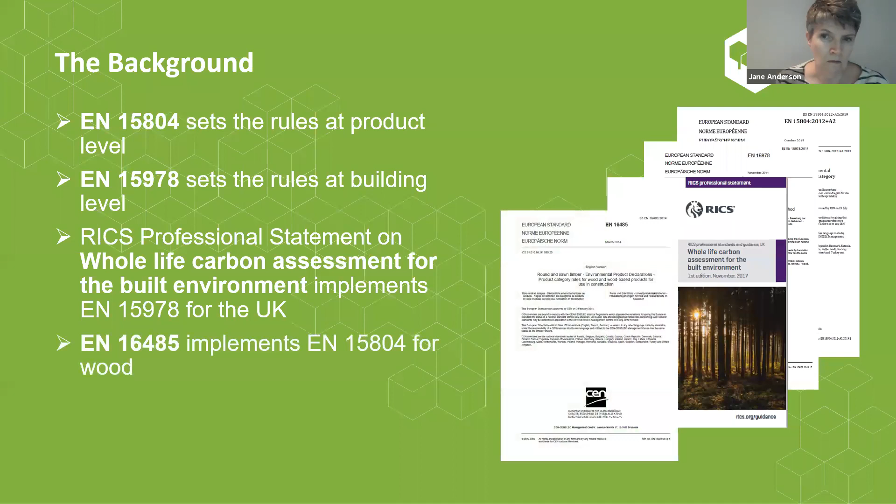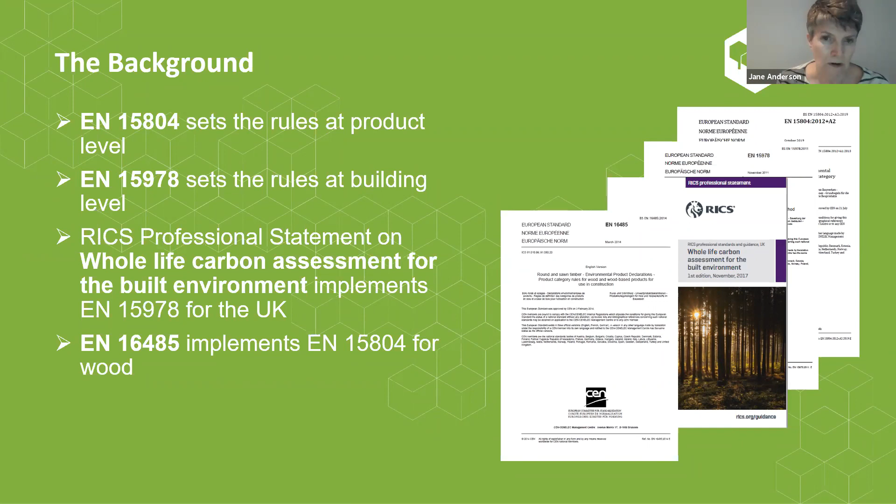The fourth standard that we use is EN 16485, and this is basically the timber industry's implementation of the EPD standards. It provides guidance on the detailed application of the EPD standard for timber, so we've relied on that quite heavily in terms of setting out exactly how you look, for example, at the end of life and at carbon sequestration.

And then the final standard is EN 16449, and that's quite a simple standard, but it basically gives you the rules to calculate how much biogenic carbon is actually contained in wood, and we'll come back to that. So that's the basis of what we've provided to you. This is the context and the background.

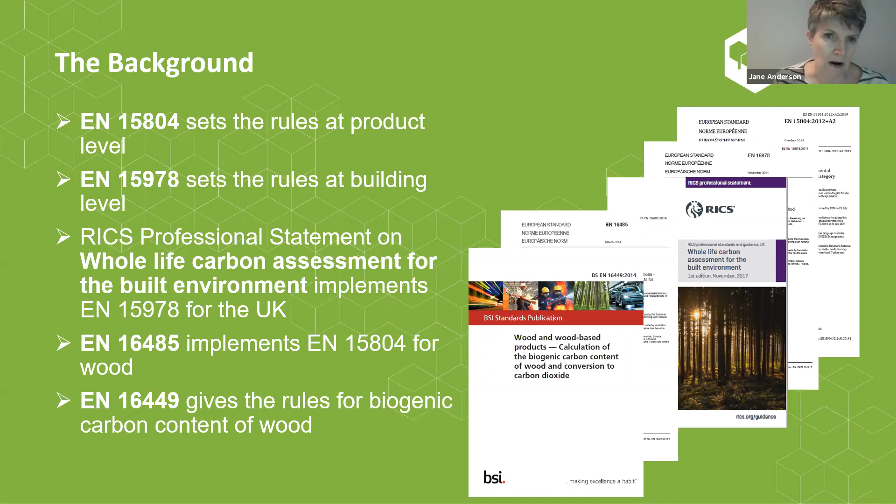As I say, these standards all kind of mesh together. They use a common framework, which I'll show you in greater detail, but it basically breaks down the life cycle of products into various stages and then into individual modules. So all of these, when we do an EPD, the data is provided in each of these modules. And when we assess a building, we can use the data for those modules to build up a picture for the actual building using exactly the same process.

And that's used in the European standards, it's used in these wood standards, and it's also used in the RICS professional statement. The professional statement is the methodology being used by the GLA, the Greater London Authority, in their requirement now for larger projects to do whole life carbon assessments. It's also been referenced, for example, in the requirement for projects to do whole life carbon by the IPA, for benchmarking. It's kind of the government's large scale procurement guidance that also links to it.

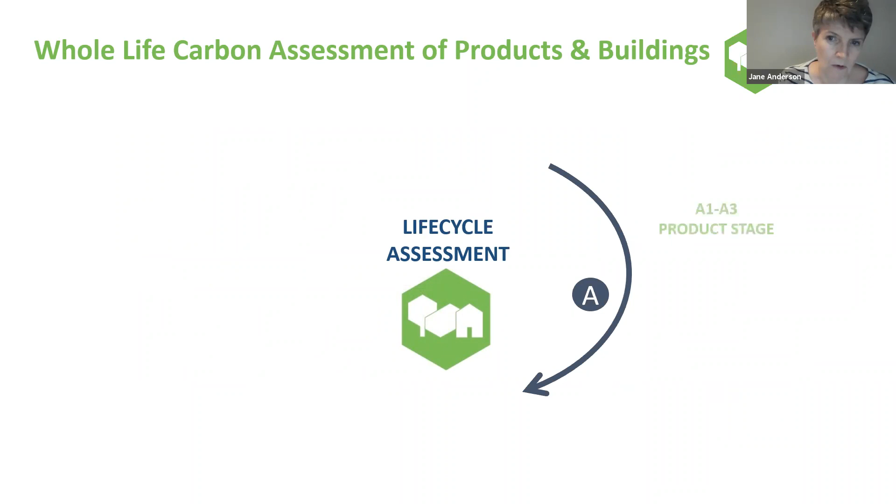As I say, in terms of life cycle assessment, we break it down into stages. A stage - these are all the stages here. The first bit is the product stage, A1, A2, A3.

So within EPDs and at building level, these can be grouped or they can be broken down. But basically, for a tree, for example, A1 would be what happens in the forest, the processes of maintaining and managing the forest and actually harvesting the timber. A2 is the transport, for example, to the sawmill, and A3 manufacturing would be what happens in the sawmill when the timber is actually processed.

Then we have the construction stage, A4, transport to site, and A5, the construction process and installation. That deals particularly in A5 with, for example, any wastage, what happens to that material, and the impact of actually making and transporting that product in the first place and then disposing of it or preparing it for recycling and reuse. So that's all the A stage of the life cycle.

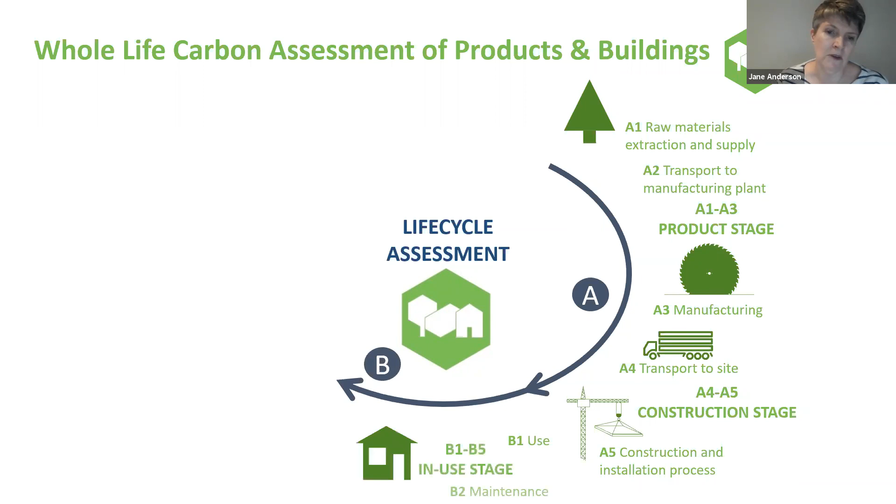Then we have the B stage, and there are B1 to B5, which are all related to the materials, if you like - emissions in use, the maintenance, repair, refurbishment and replacements. And both these life cycle stages are part of embodied carbon.

We then, as part of the A stage, going back there, and then up cradle to gate, up through the product stage and the construction stage - that's commonly called upfront carbon. So that's - you might have seen that recently - and that basically is all the impacts up until practical completion. I will come back to one special aspect about upfront carbon in relation to timber, so it isn't all of the impacts and benefits there.

And when we look at module B, there's also operational carbon. So this is basically all of the impacts from providing energy into the building for heating, cooling, lighting, ventilation, and for water - so providing hot and cold water into the building. So that's the whole of the B stage, the use stage.

And then we have module C, the end of life stage. And that basically covers the deconstruction or demolition of the building, the transport of waste from the building, any waste processing until it reaches the end of waste, or disposal. So if it's put into landfill or if it's incinerated without very much energy recovery, then that's in module C. And again, module C, because it's relating to the materials, is considered as embodied carbon. So we have this split between embodied and operational carbon.

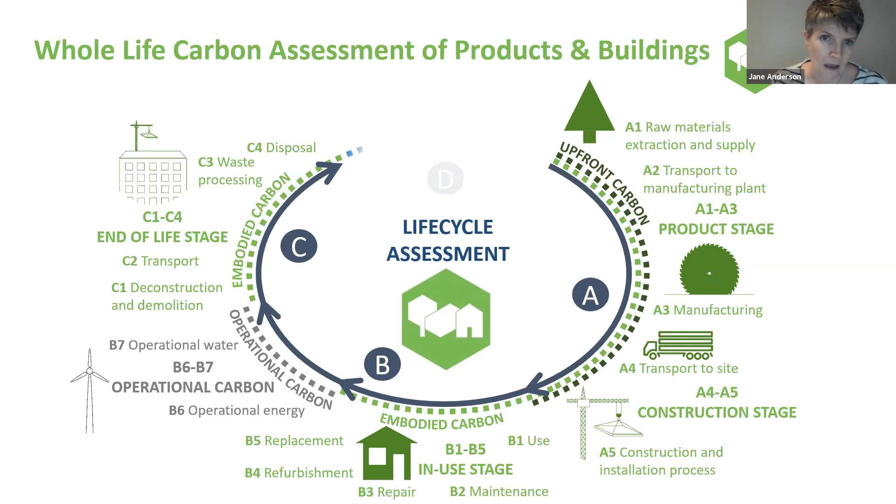And then the final stage of the life cycle we call module D. So basically, it's not actually part of the building life cycle. It's the benefits that occur beyond the end of the life of the building, or when waste comes out of the building and it's recovered.

It basically shows the benefits of that in terms of avoided production. So quite often you have to recycle, say, metals, and then show the benefit compared to making new metal from scratch. That's included in Module D. So it's a kind of indication of the circular economy.

It has to be said, one of the problems with it is if you were to build your building entirely of recycled materials, then your Module D would actually potentially show a big disbenefit of having to produce materials to top up, because you wouldn't have generated any waste, and you potentially produce less waste than you've actually used as scrap, for example. So it's not a perfect indicator of a circular economy, unfortunately. But this is the kind of life cycle that we follow all the way through.

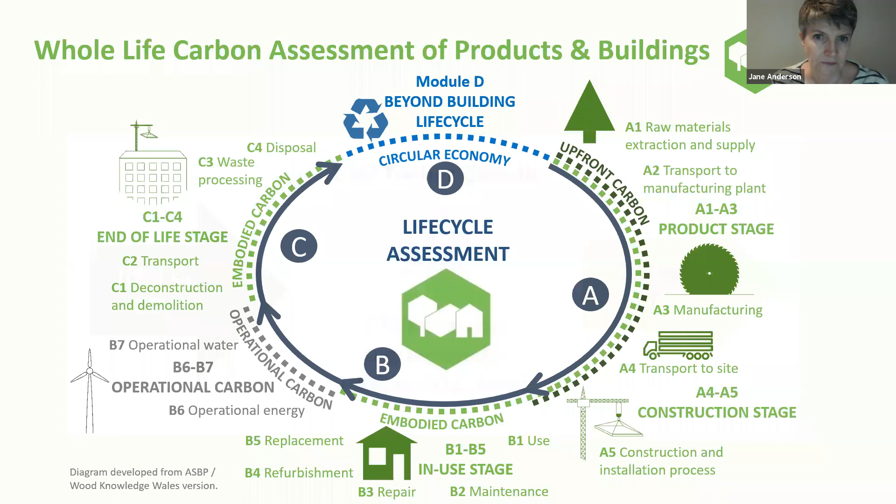So one of the huge benefits of timber is that it sequesters carbon as it's growing. You can see here that 1 cubic meter of timber, as it's grown, is expected to absorb about 1,000 kilograms of CO2, and also beneficially produce about three-quarters of a ton of oxygen at the same time. And that will store within the timber - this is wet timber - about 273 kilograms of carbon within it. So this is a huge benefit, taking CO2 out of the atmosphere and storing it while the timber is growing.

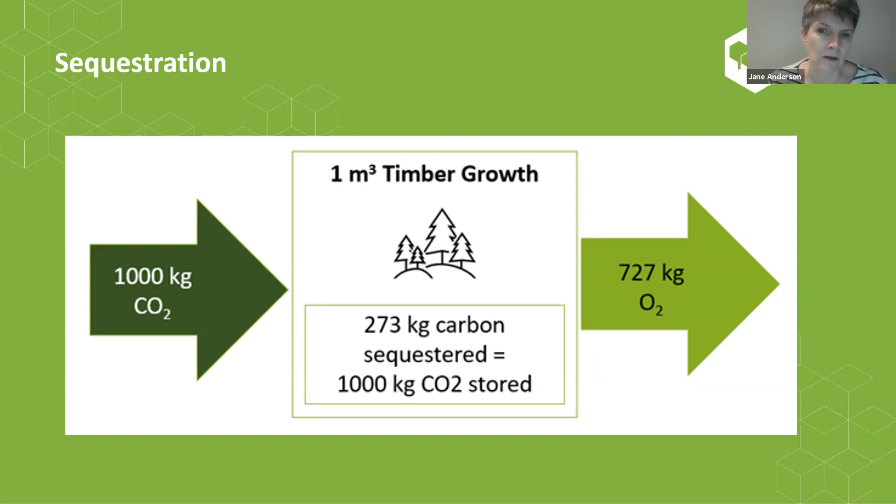The question is, what do we do with it when it goes into the building? But we'll come to that. And as I say, this is a huge benefit. It's not just the timber that's within the tree itself, but we also have what's in the root system, within deadwood, within litter, and the soil within forests.

When we look at the same graph in the UK, obviously because we don't have as much forest - I think it's only about 13% of the UK land area is forest - and we use a lot of imported timber, so we have more harvested wood product in the UK as a proportion of our timber, but it's still quite substantial. So it's really a question of how we show this and how we assess this when we're doing life cycle assessments and embodied carbon assessments.

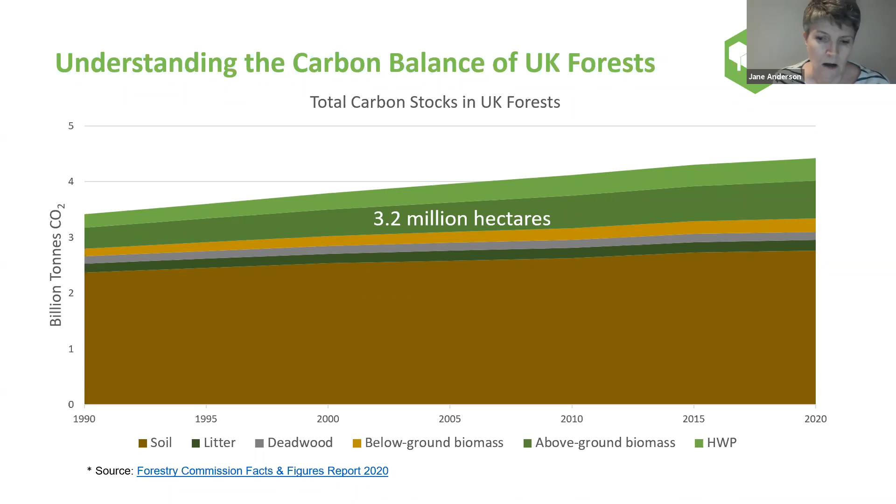Just highlighting a house, typically if it was made with a timber frame and timber cladding, for example, it could store almost 15 tons of carbon CO2. So it's quite a substantial benefit that's come into the forestry system and then been transferred into the timber that's being used, and what we actually end up with stored in the building.

Then at the end of life, there's effectively two things that can happen to it. One, it can be released - so if the timber is, for example, burnt in an energy recovery system, then the CO2 is released. Or it can be recovered, and if that timber goes, for example, back into timber products as particle board, if it's chipped and used in particle board, then the carbon within it basically stays within the building and out of the atmosphere.

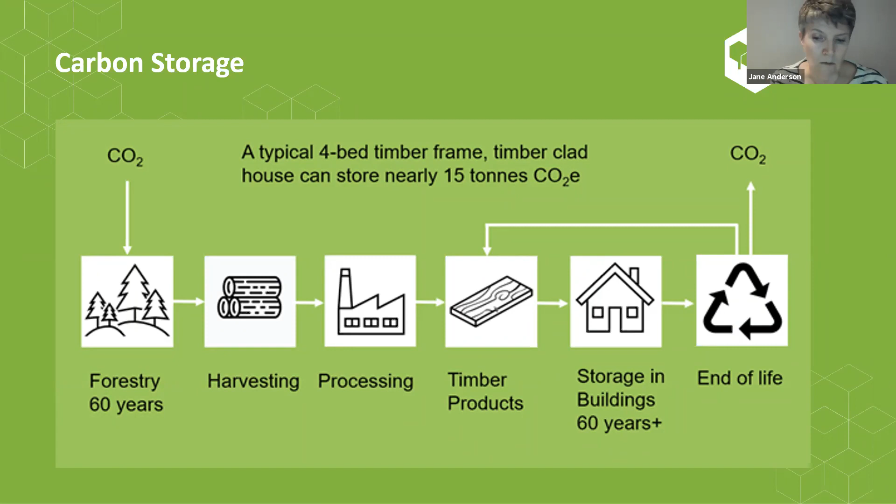We also have other routes it can go in terms of recovery, so it can go, for example, into animal bedding, but those tend to be quite short-lived, and at the end of that life it's probably going to be released again as CO2. So it really is the best option if we can recycle timber back into timber products that will have, again, a long life in buildings.

So the big question: fundamentally, we have this carbon that's stored, brought into the forest through sequestration and photosynthesis. Then when the timber is harvested, that carbon is transferred into the products that we have. And there's a question about when we should account for this.

I think this diagram shows you three different approaches. The short dotted line in the top graph shows the carbon in the forest, which accumulates gradually, and you have more within the forest because we've got carbon within the soil and within all the timber that's harvested.

When it goes to the sawmill and is processed into a product, some of that carbon is transferred to products like particle board made from the sawdust. Some of it is used for energy, and we only end up with a proportion of it within the products.

So we could account for it being accumulated over the life of the forest and then coming into the product. There's another approach that's been suggested. The first approach we call backwards looking. The second approach, forwards looking, would be to say you harvest the timber and then start to count the carbon being added to the forest that you've replanted.

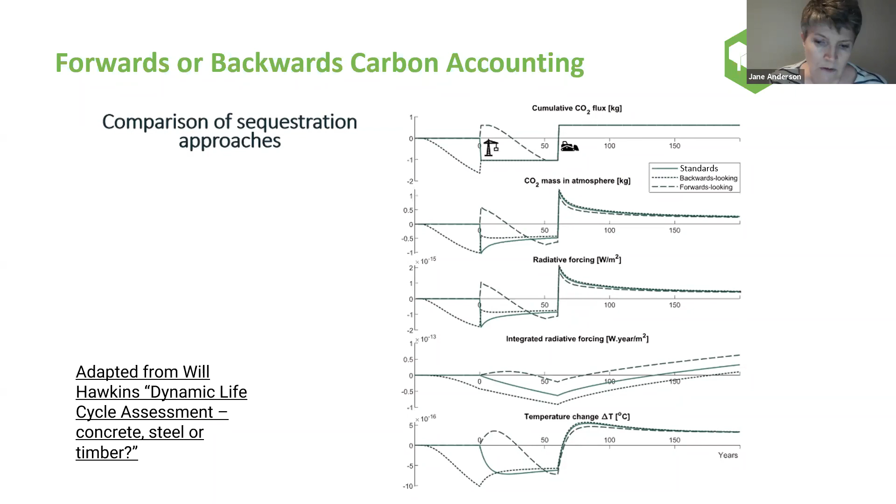I think effectively this middle ground, assuming the timber enters the system from the forest and that the forest is a separate system, works quite well, and that's what we do within the timber calculations. At the end of life of the building, there's a big increase, which is what happens when you dispose of the timber, or it's recycled and transferred.

So now, how do we actually calculate how much carbon is in products? This is where the standard 16449 that I mentioned comes in. There's a formula which is a bit scary, but effectively for timber, due to the chemistry of cellulose and lignin, half of the dry mass of timber is basically carbon.

You multiply that carbon by 44/12, which is the mass ratio of CO2 to carbon, to get the mass of CO2. So it's effectively a question of knowing how much timber you have, its density, its moisture content, and being able to find the dry mass and halve it to get the mass of carbon stored within it. For other products, it's more complicated, but you have to look at the chemistry to work it out.

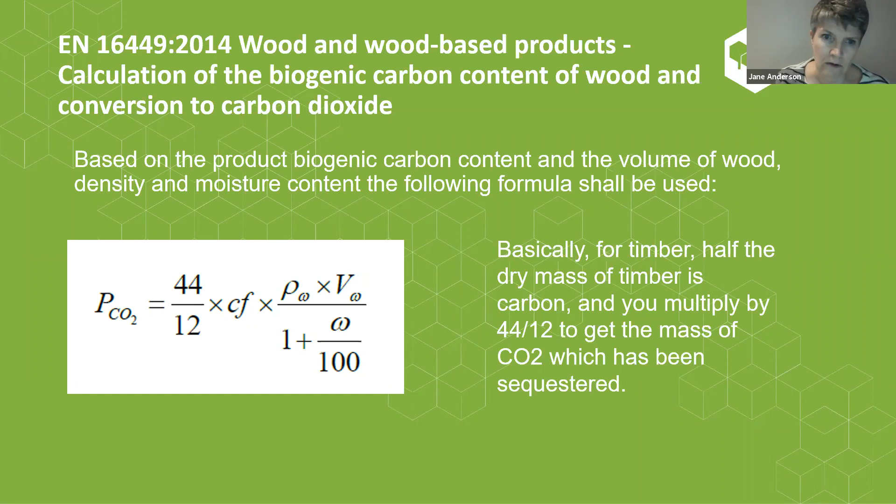As I said, you're not always allowed to take account of sequestration, and it's slightly annoying that we've got two different approaches in the two versions of 15804. The new version came out in 2019, and the old version, 15804A1, will stop being used at the end of this year, but there will still be EPDs valid for around 5 years, so it's still going to be there.

Effectively, 15804A1 looked at whether the timber was sustainable or not. There were two routes: one was if the amount of forest carbon was increasing in the country, that's Article 3.4, and also if it was sustainably managed, so PEFC, FSC. In both of those cases, you were able to take account of the sequestration. That was the first approach.

What we have now in 15804A2 links to the way the European Commission's product environmental footprint looks at timber, and they are very keen on ensuring that what they call native forest is not used. The way they define native forest is that it's not managed forest, not degraded forest, and there's no harvesting or rotations of taking timber out of it - it's primary forest where there's no human activity, or old growth forest. That's the differentiation.

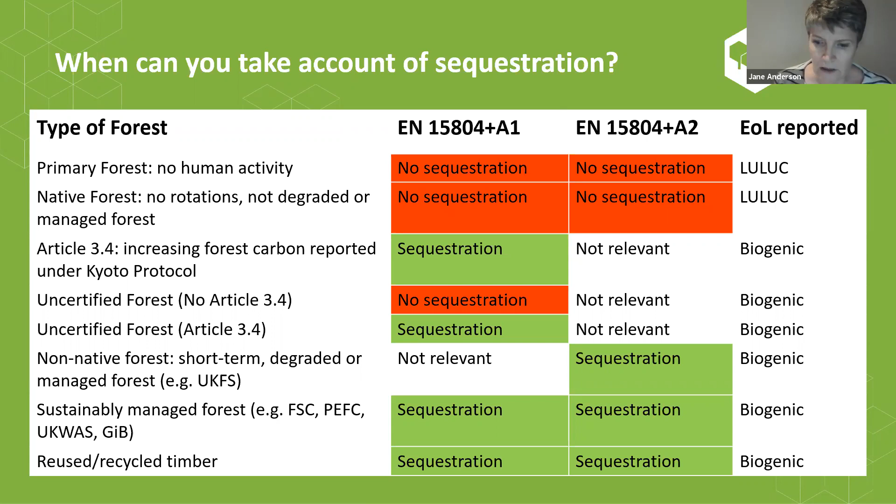Just giving you some information here on the Module A1 stage. What we do is we assume that the timber, when it's looked at in A1, this is where the timber is harvested, this is where the carbon comes into the system. You can see here, this is pretty typical for softwood, that it's got 733 kilograms of stored carbon, CO2, within it, and a relatively small amount of fossil CO2 that's actually been produced during that process of growing the timber and extracting it, because it's fundamentally a very low impact process.

You then have the impact of transporting it to the manufacturing plant. Again, generally these manufacturing plants are located close to the forests, so there isn't huge amounts of transport here. And then the actual manufacturing, again pretty small, because it's now very, very common in forestry, in sawmilling and timber processing, that they're actually using the timber waste - the sawdust, the chips from processing it, the bits that are not quite square that you get from a circular trunk - they're using all of that wood waste as fuel instead of gas or another form of heat.

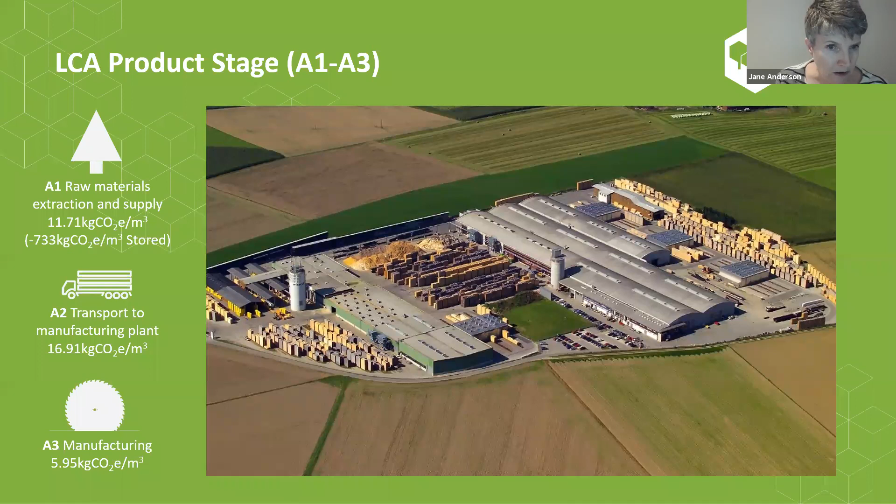They're very often also using CHP, generating electricity through that process. So very often you'll find there's very little manufacturing impact because it's using bio-based energy there. Where we do have more impact is in terms of transport to site, particularly seeing as we're importing a lot of timber in the UK - I think about 80% of the structural timber we use is imported. Then we have the actual process of construction and installation, and again that can be a significant impact, particularly if you have timber wastage and the processes of lifting and installing it.

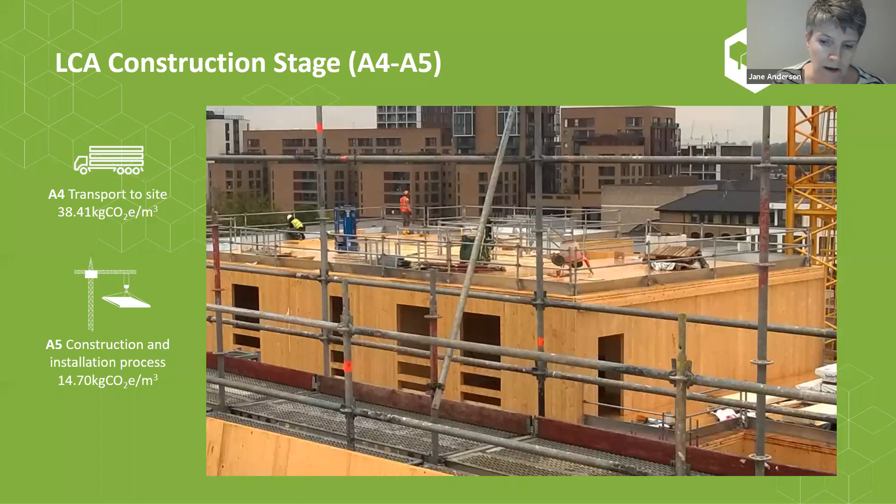When we look through the B stages, it's really about maintenance, repair, replacement. The way to minimize impact here is in terms of reducing replacements, using timber that's more durable. The example here is heat treated timber from Brimstone, which, because it's been heat treated, is much more durable than normal timber would be, and it doesn't need the preservation processes - again reducing the impact of the building going forward.

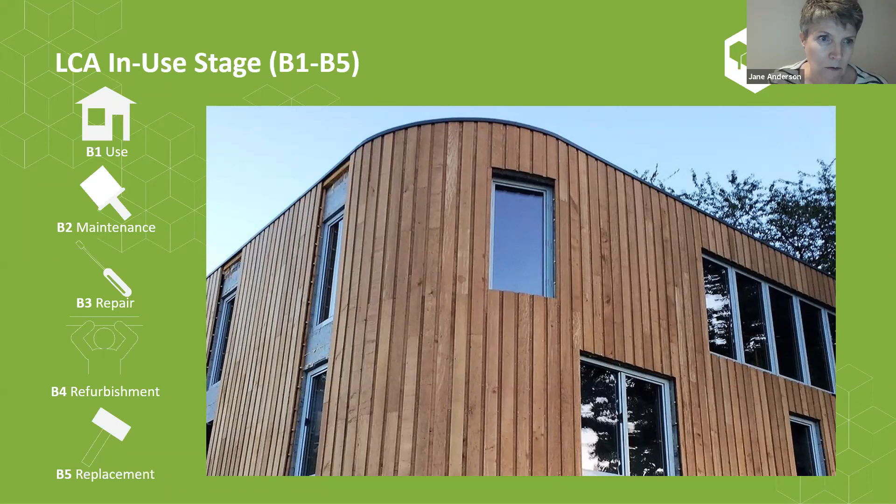It's Brimstone, that's the name you're thinking of, Jane. Thank you, that's on the tip of my tongue.

And then we have the end of life stage, and this is where it gets quite interesting. The impact of deconstruction and demolition is generally not terribly big, because it's not a particularly intensive process.

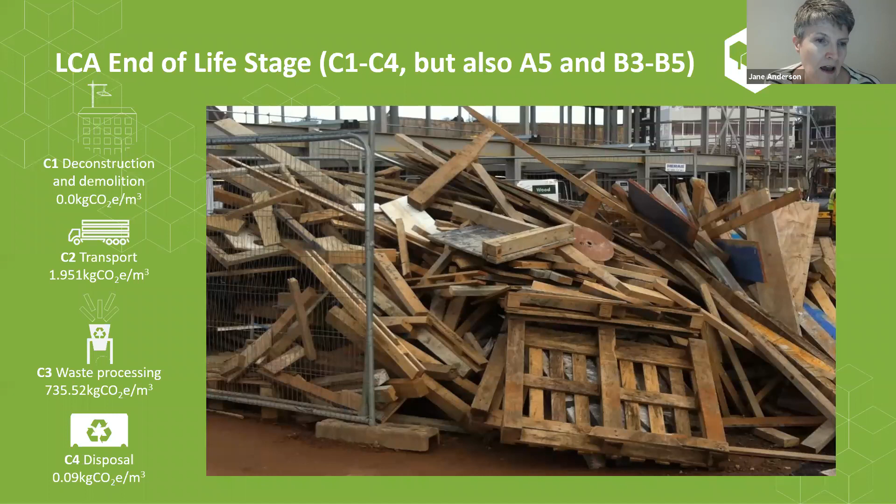Transport can be significant, but not particularly, because most waste processing is now reasonably close to where buildings are being demolished. Then the waste processing, you can see here there's really quite a significant impact. This is basically because when we recover wood, or use it for energy recovery, that carbon basically leaves the product system.

So it's either emitted when we burn the timber, or it's transferred to the next product system. You saw that recycled timber has this sequestration, it's able to take it. Because if you're recycling timber, you basically need to take the CO2 out of your system and transfer it to the next system. So it's treated as an emission, even though that timber hasn't actually gone into the atmosphere. You can disagree with that, but it kind of has to happen as an accounting process. We may at some point find a way of providing more information about the benefits of keeping that timber within the building system and out of the atmosphere. At the moment, that's not possible.

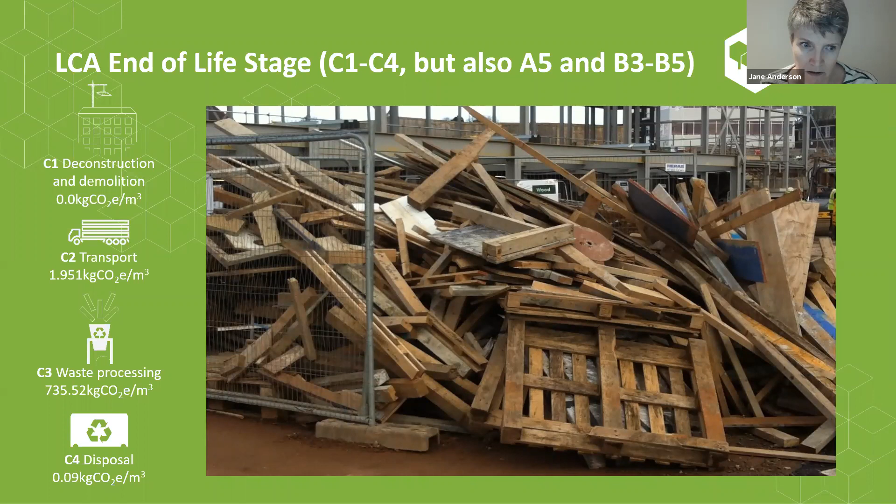And then in C4 here, this is basically just dealing with residual waste from that recycling process. But if you were, for example, to landfill your timber - it's very uncommon, about 1% of timber is landfilled now - then the way the standard looks at it, you actually have to report any carbon that hasn't decayed and been released as landfill gas and potentially used for energy, and you have to transfer that to nature. So you would have a substantial emission in C4 if you were landfilling timber, but hopefully that happens very, very rarely.

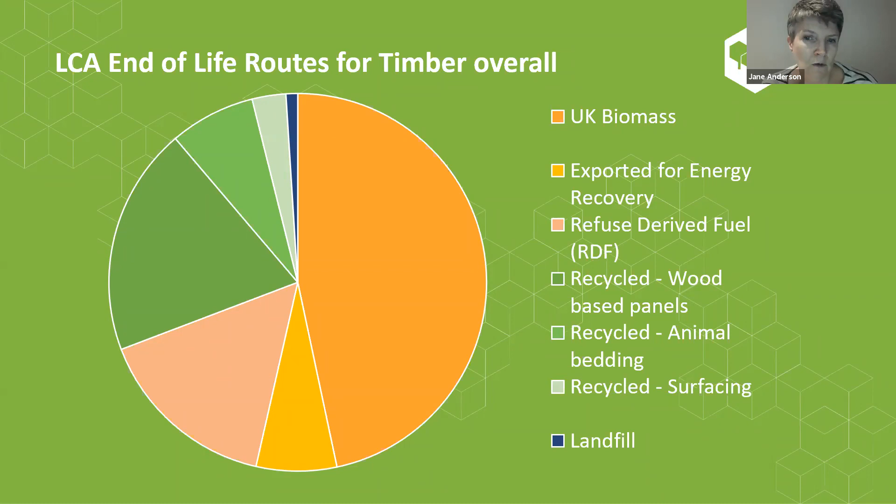So this is just an overview of where we think timber generally is going, and you can see that actually the vast majority of timber is used as biomass fuel, exported for energy recovery overseas, or refuse derived fuel for the kind of low grade timber wastes. A reasonable proportion, just under a quarter, is actually recycled into wood-based panels, a smaller proportion into animal bedding and surfacing, so kind of equine surfaces, things like that. And, as I say, a very small proportion into landfill.

If we look in a little bit more detail, this is just looking at the breakdown for different types of product in terms of where they can go. So you can see, for example, that it's only solid timber that hasn't got any preservative treatment that can actually be used for animal bedding and surfacing. None of the products that have glues in them, so engineered timber or wood panels, products like plywood or chipboard, or any of the timbers that use preservatives, can be used for that purpose.

Effectively, kind of biomass, using it for energy - all of those can be used, particularly in the large biomass installations that have very good processes in terms of disposing of hazardous timber, for example. So everything can go to that. Reuse - most of these products can be reused, and that's by far the best option if we can. Unfortunately, it's not yet as common as we would hope it could be.

So this just gives you an overview of where timber can go, and hopefully things like the refuse derived fuel - that's really only for the very low grade, kind of what's left residuals - rather than if you've got a large piece of timber, it's much more likely that hopefully it would either go to wood-based panels or be used for energy recovery.

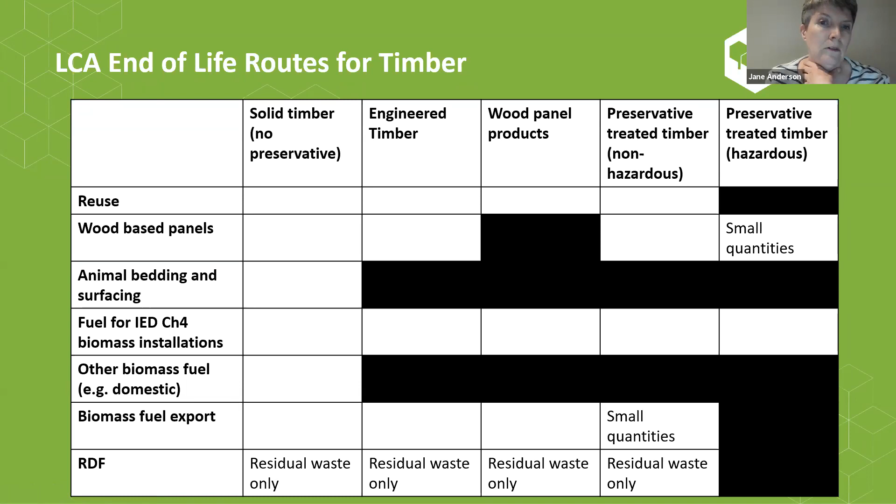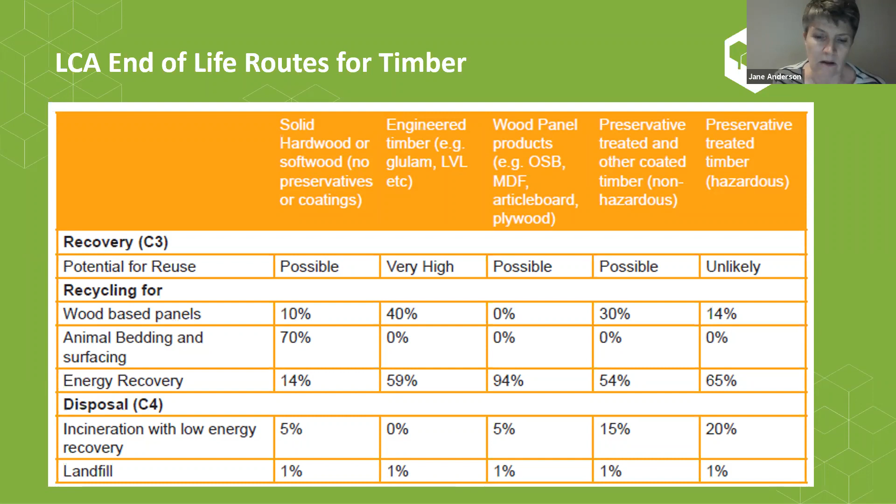But you'll see we haven't included reuse as an actual percentage there, because at the moment it's not common. But certainly, for example, for engineered timber, its potential for reuse is really, really high. So we very much hope that that is what will happen to it at the end of life. But obviously, there's not huge amounts of glulam coming out of buildings at the moment. So, yeah, that hopefully will be very useful going forward as the position to be adopted for end of life treatment in EPDs for the UK and building level assessments.

I've said reuse is really the best option, and the way we like to hope things would happen is that timber would first of all be reused where it could be. So we've got this reclaimed timber having its second life. You try to keep the first life as long as you can, then reclaim and reuse the timber. Then when that building comes to the end of its life, the next best option is recycling the timber for use in wood panels, like chipboard, and they're starting to look at it in terms of OSB too.

I think there's hope to trial that shortly. And then really the last resort is bioenergy, because once you've done that, you can't use that wood ever again. It's gone, and effectively when we use bioenergy we're releasing CO2 into the atmosphere, and the atmosphere isn't that picky about what type of CO2 is coming in. So it's only an accounting approach that balances releasing the CO2. So if we can avoid using bioenergy, that really would be the best option, and only use it as the last resort.

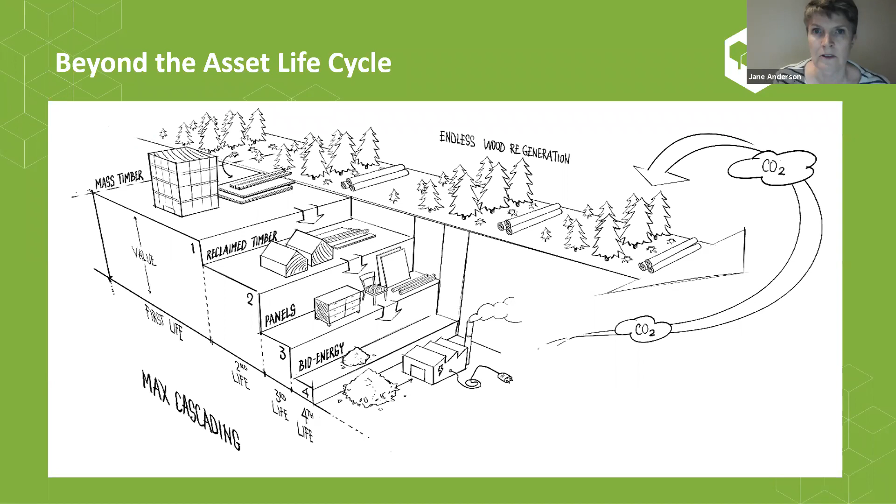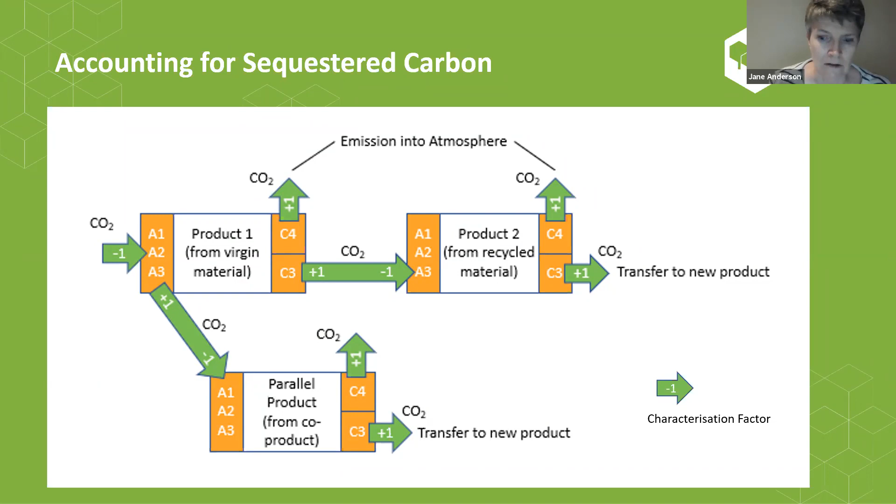I'm really sorry about my dog if you can hear her barking. No, she doesn't like to be on her own, I'm afraid - a victim of lockdown.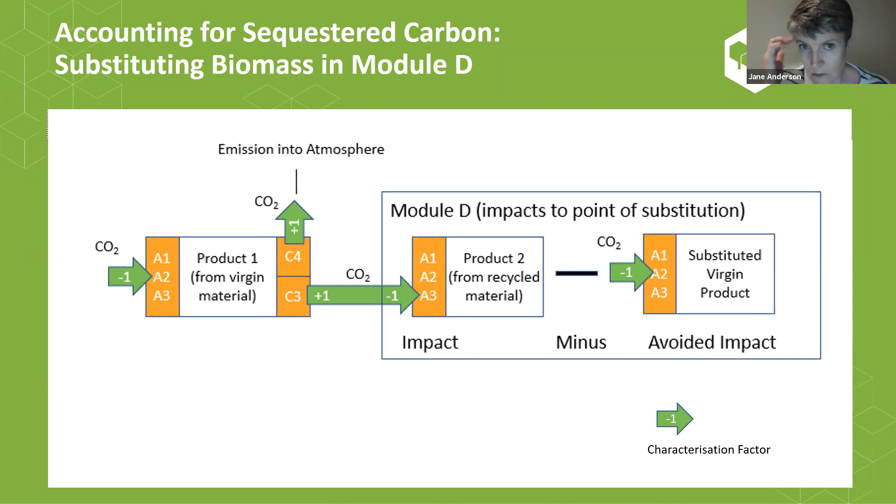So that's in module D. You shouldn't really see big negatives related to sequestration in module D if it's a timber product substituting a timber product. It is different, however, when you're substituting non-biomass. For example, if you're using your timber for energy recovery and your product is electricity and heat, then your substituted virgin product would be normal grid electricity, which obviously doesn't have the sequestration.

Actually, that's not such a great example. But if you had a timber product substituting something that wasn't timber, you'd be able to show that benefit because you're not deducting the sequestration again. If you're making energy from it, you've burnt the carbon, so you'd release the CO2 - you wouldn't show any benefit, just the benefit of avoiding grid electricity.

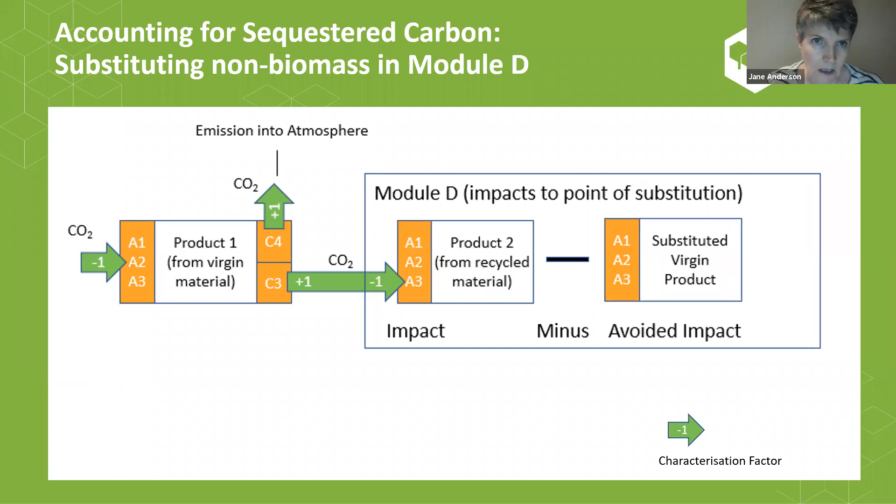Over the building cycle, this is where it gets interesting again. What we have - I showed you upfront carbon and embodied carbon, and then whole life carbon, which actually includes the operational carbon. So it's the whole impact of assessing the building.

If we look at upfront carbon, normally, and certainly within the standards, you're expected to include the sequestration, the biogenic carbon, within A1, within that upfront carbon. The problem is that buildings using a lot of timber get a negative emission, and that isn't really correct. There's a big benefit from carbon storage, but it produces the wrong kind of incentives. We want people to build with timber and substitute other materials because that's beneficial, but we don't want people to put too much timber into a building as a way of offsetting other impacts from using other materials.

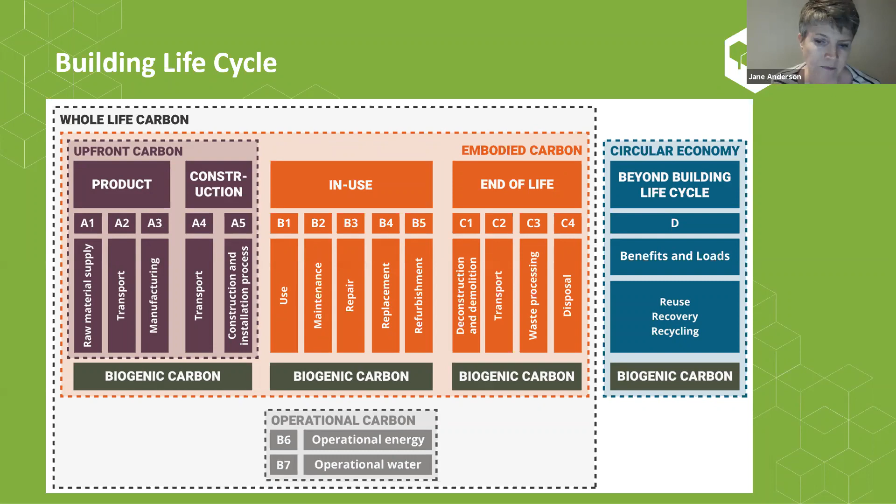So when we assess upfront carbon, you'll see the purple section here actually excludes the biogenic carbon. Within the RICS guidance, the professional statement, where we're just looking at upfront carbon - if that's all you're reporting, or reporting an upfront figure on its own - you would exclude the biogenic carbon included within it, although you can give that as additional information. But when you look at embodied carbon over the whole life cycle, you can show that biogenic carbon uptake in module A, and then its release or transfer in module C. So that's explaining how that works.